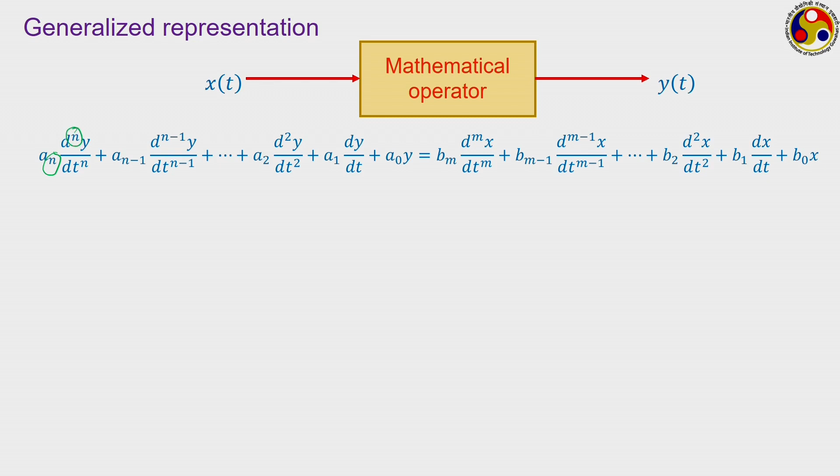Here a naught, a1, a2, all these are the coefficients, and this n is generally referred as the order of the system. On the right hand side we have the input part in terms of x, with several coefficients b naught, b1, b2, etc. up to m. N and m may be same or different, but both are integer numbers.

Order of the system is given by n, not by m. When n equals 0 we call that a zeroth order system, when n equals 1 we call it a first order system, and it goes on that way.

Now, quite commonly in mathematics or system analysis, instead of using the differential notation d/dt, we like to represent this in terms of an operator capital D. If you introduce that capital D operator, it looks quite similar to an algebraic equation, but be careful, D is not any algebraic quantity, rather it is just an operator, the differential operator. So this is the equation relating y and x in terms of this operator D.

Drawing analogy to algebra, we can represent them in a form where the numerator contains the coefficients associated with the input and denominator contains the coefficients associated with the output. Here we are getting a ratio of the output to the input. Both may be time varying or time invariant, but our focus is more on this right hand side, which gives the ratio of output to input.

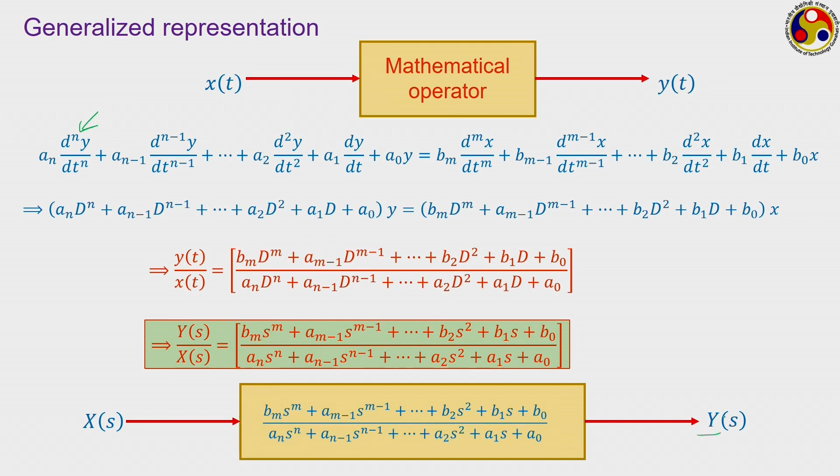The advantage of this Laplace transform is that the ordinary differential equation with time as the independent variable gets converted to an algebraic equation with S as the primary variable. Here input capital X is the Laplace transform version of the small input x, and capital Y is the output represented in the frequency domain, with the mathematical operator performed on x to get y.

This mathematical operator we often refer to as the transfer function. G is one common way of representing this, but there are several other ways too. This concept of transfer function is a very important one in this topic of measurement systems.

Some of you may have already gone through a course on control systems and found similar treatment there. If you have already done control systems, the entire content of this week may be very familiar to you. But the idea of transfer function is to represent the entire mathematical operation performed by this measurement system in terms of a single operator, which is this transfer function.

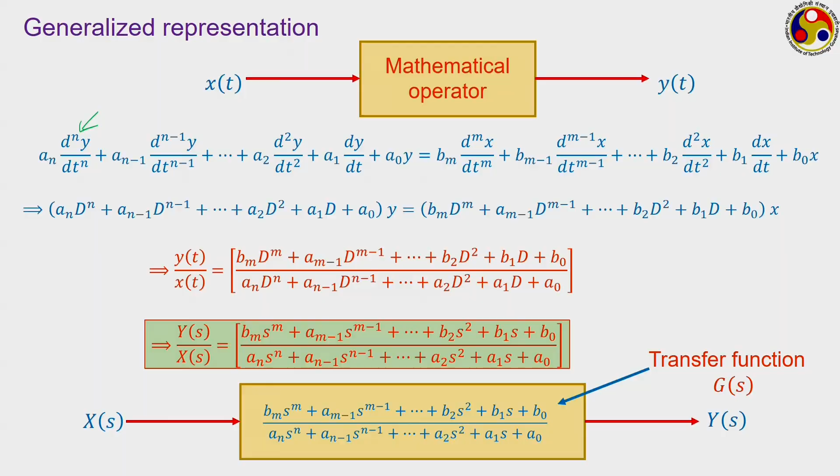Once we know the transfer function of one instrument, we can very easily relate the input and output by performing corresponding mathematical manipulations. An even bigger advantage is that when we have multiple instruments or components in a measurement, using these operators we can easily connect different components to get an equivalent transfer function.

Let us see an example here. This is an example of a quite complicated measurement system, where we are using a series of operations. Here R refers to the input and Y refers to the output.

Let us just instead of using R, stick to our original notation X. So X is the input, Y is the output, and here there are several operations being performed, like several instruments having their transfer functions as G1, G2, G4, etc. There are different components, and also 3 components, H1, H2 and H3, which refer to feedback.

I am sure you have some idea about feedback, which is primarily used for control operations. Whatever variable value you have here is passed to the component having transfer function G5, but that same signal is also routed through this feedback component back to the original input position. This gives, instead of supplying the original signal X, if there was no feedback the original signal would have been X, but here as we are supplying something, the original signal will be X plus H2 times whatever we have here.

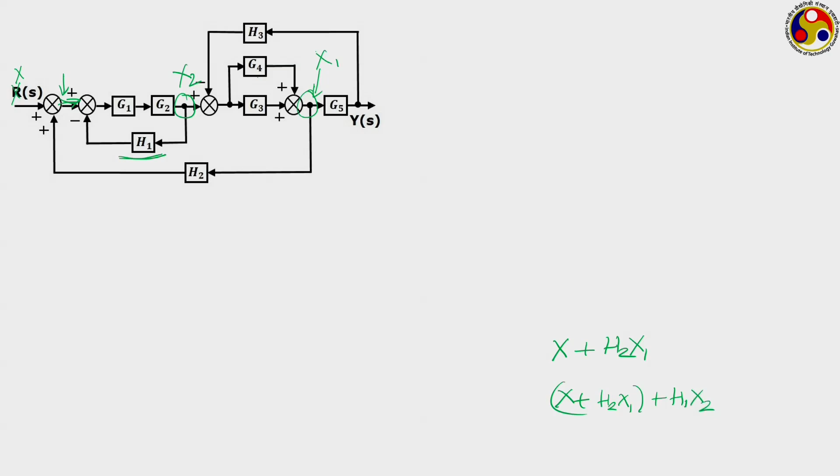Suppose at this particular point our variable value is X1, then it will be H2 times X1. This is the signal coming to this portion through this line. Then we have another feedback here. If the value of the signal at this point is X2, whatever is being transferred here is X plus H2X1, which was already coming, plus H1X2. This is the signal reaching this particular component. This is the idea of feedback, and using these components we can easily calculate the corresponding transformations.

Now there are several components. If we count properly, we can see there are 5 plus 3, total 8 components involved, each having its own transfer function, so somehow we have to combine them. That combination process can be very easy. There are generally 3 kinds of possibilities we get. First possibility, let me erase it to make it a bit cleaner.

First possibility is where we have 2 components connected in series. Connected in series means the output from the first component is directly fed to the second component. If the first one has transfer function G1, the second has transfer function G2, and X1 is the signal fed to G1, its output is X2. Then this output is directly fed as an input to the component having transfer function G2, giving a final output X3.

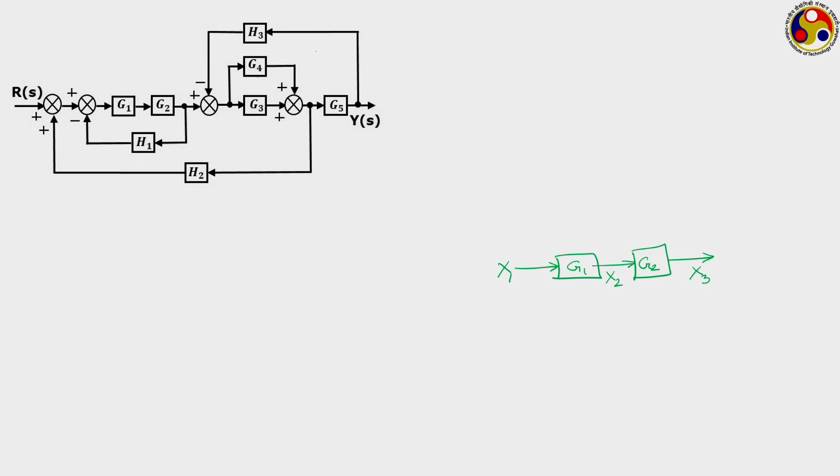Then how can we calculate this? Using the notation for the first component, we know output upon input, X2 upon X1, will be equal to G1, giving X2 equal to G1X1. Now look at the second component. Output from the second component is X3. What is the input we are giving? That is G1 into X1, and that leads to our output as X3.

Output from the second instrument is X3 and its input is G1X1. That equals the corresponding transfer function G2, giving X3 equal to G1G2X1. Hence X3 upon X1 equals G1G2, which is the combined transfer function of these 2 components. This means when 2 or more components are connected in series, their equivalent transfer function is the product of their individual transfer functions. We can see one such arrangement here. So this is possibility number 1.

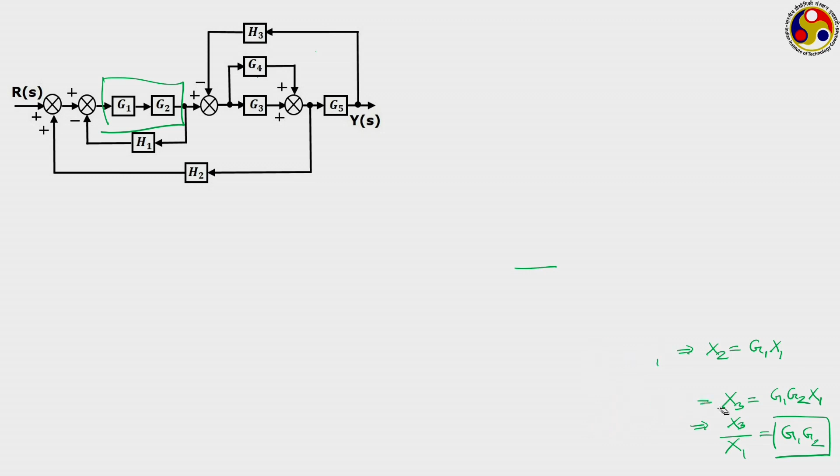Let us move to the second possibility: when components are connected in parallel. Parallel means they are subjected to the same inputs; rather, both ends are connected to the same point. If X is the net input supplied, a component of X which is X1 goes to the first component having transfer function G1, and the remaining portion X2 goes to the component having transfer function G2.

From the first component we get an output Y1, from the second we get an output Y2, giving us the net output Y. We can easily see that X equals X1 equals X2. Now what is the relation between X1 and Y1? Using the definition of transfer function, we know Y1 upon X1 equals G1, and Y2 upon X2 equals G2.

Hence y, which is y1 plus y2, will be equal to g1 x1 plus g2 x2. This is the net output we get. If our interest is to get the net transfer function of this full assembly, we need a relationship between net output y and net input x, which will be g1 x1 upon x plus g2 x2 upon x.

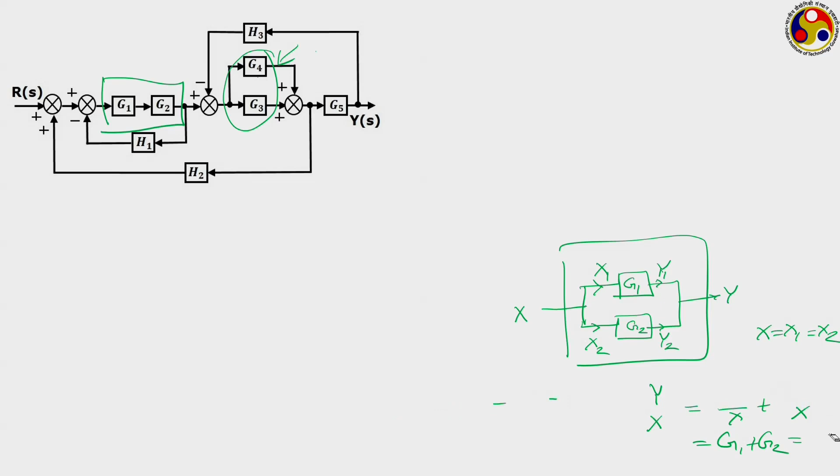Using this knowledge, we can say that for this assembly our equivalent transfer function will be g1 into g2, whereas for this assembly it will be g3 plus g4. That is what we have here: g1 into g2 replacing the individual components, and g3 plus g4 replacing the individual components.

Now we have another situation involving a feedback loop. The idea of feedback is: let you have an input x transferred to a component with transfer function g to get a net output y, but you want to control the value of y itself.

This output y is routed back to a feedback controller, generally denoted as h with its corresponding transfer function, and supplied here, where they may be connected by a summation component. So x is supplied here, and also a modified portion of y is supplied here, giving us this net.

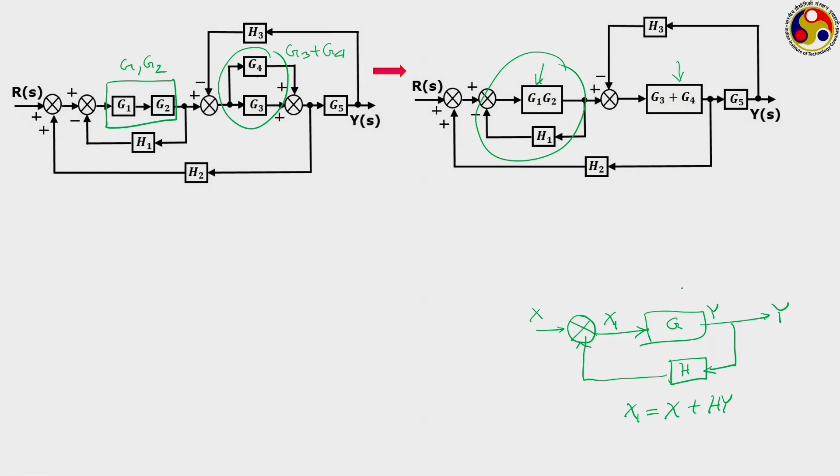So this may now become x1, and we get y as the output. What will x1 be? x1 equals x, the original input, plus h times y. Then going back to the original component, its output is y, and the input it senses is x1, which is x plus h into y, giving us g.

So we have y equal to gx plus ghy. If we rearrange, then 1 minus gh, times y, is equal to g into x, which leads us to a net transfer function, represented as g bar, equal to y upon x, as g upon 1 minus gh.

Here we assumed in this summation component that both signals are being added to each other, but that may not be the case. In this one both are added, but in this case they are subtracted. If subtraction is there, instead of 1 minus gh, it becomes 1 plus gh. So this way we can connect a feedback loop as well.

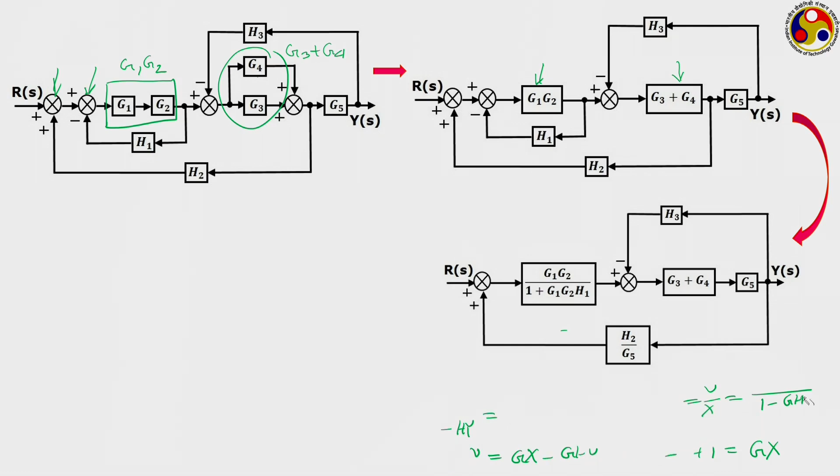Let us see what we have here. Let me clear this clutter. In this third step of modification, we have added the feedback components. Look at what we have: this G1 G2 combination has been combined with H1 to get G1 G2 by 1 plus G1 G2 H1. Look at where the minus sign is here, which led to this plus sign here.

We have also made another transformation: this particular component has been shifted to this part to make it easier. I leave it to you to calculate this H2 upon G5, using the same algebraic modification. The rest is quite easy.

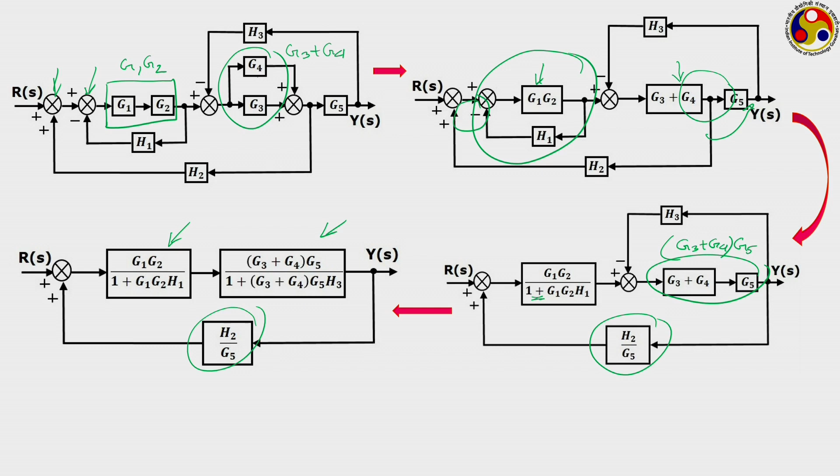This whole thing here, we have G3 plus G4 and G5, so the equivalence of this becomes G3 plus G4 into G5, with H3 as a feedback component leading to this. We already have this remaining part, and this is the feedback which leads to this final transfer function, so your input gets modified to give this output in terms of the transfer function.

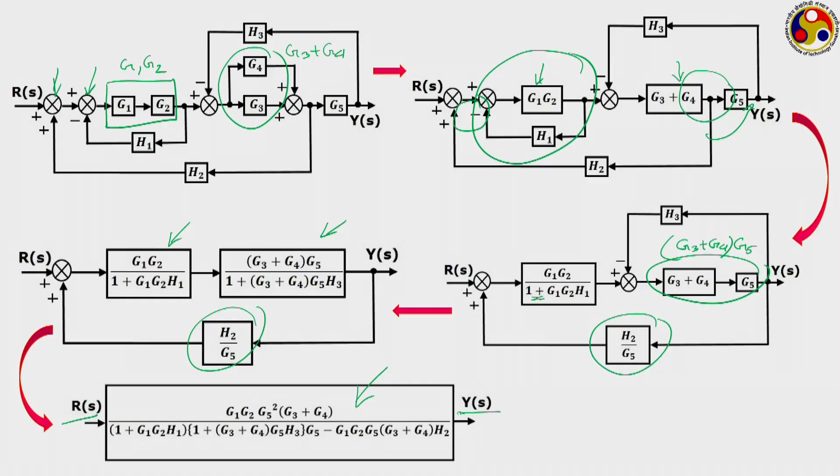Now, if we know the expressions for each of these individual 8 components, we have the final transfer function. So the concept of transfer function makes it very easy to combine different components of a measurement system into a single transfer function, which we can then deal with using several standard mathematical procedures. So today, in the remaining part of this lecture, we shall discuss how to derive these transfer functions.

Before that, we have to talk a bit about standard inputs also. Once we know the standard transfer function of a particular component, theoretically it is possible to subject that instrument to infinite types of inputs, but it is not possible to standardize the response for each of such possible inputs. So what is commonly done is we test the response of a measurement system with known transfer function against some standard inputs, and whenever we are dealing with an unknown or different kind of input, we try to represent it as a combination of the standard inputs.

As we have seen in the previous lecture, whenever we have a periodic function to deal with, we can separate it into several harmonic components, and then the net response of the system should be the summation of the individual responses to each of the harmonics. Similarly, there are a few other types of standard inputs possible.

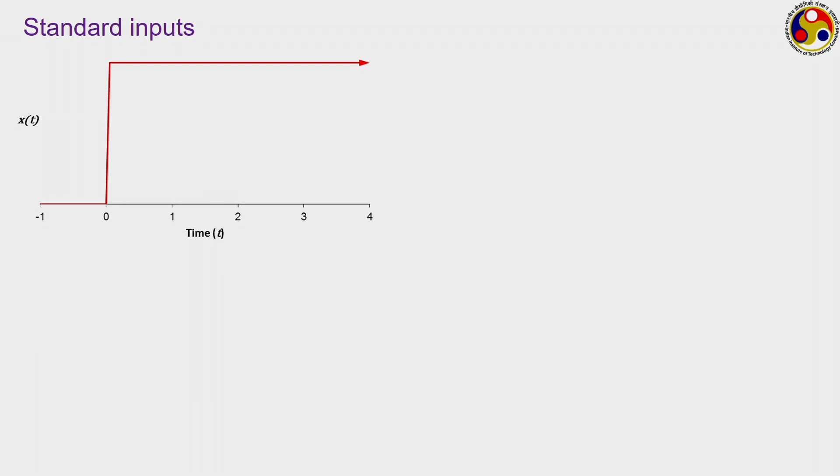Like this first one, something we have already seen in the previous lecture. Here the input is 0 or constant till a particular instant of time, and then there is a sudden jump in the input to reach another constant value and remain there for the rest of the time. This is referred to as a step input. So x equals 0 as per the diagram here till t less than 0, and for t greater equal to 0 it becomes a constant.

This constant can be positive or negative, and the initial value may have some other value also. Like the example discussed in the last lecture, a thermometer was initially at a temperature of say 30 degrees Celsius, and suddenly we take it to an environment having a temperature of 90 degrees Celsius. Then this is being subjected to a step input.

Instead of an increase in value, suppose we take it in contact with a block of ice, then it has again been subjected to a step input, but instead of an increase in value, it is suffering a decrease in value. Such inputs are called step inputs.

Along with the thermometer, there can be several other examples. Let's say a very arbitrary example: you want to measure the mass of a pack of sand. Initially your measuring platform is empty, no load, and now you suddenly drop this entire bag on top of it. So its load was initially 0, and now suddenly it is being subjected to a constant mass. If the mass of the bag is 50 kg, the load suddenly increases from 0 to 50 kg, and that 50 kg is retained. So that is what we refer to as a step input.

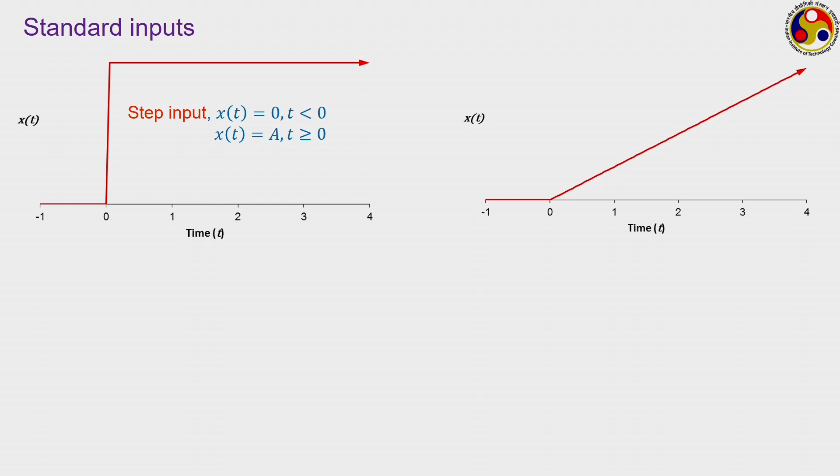Next is the ramp input. Here the input signal is 0 till a certain time, and then it changes, but there is no drastic change, rather it changes continuously with time following a linear path. This kind of input is referred to as the ramp input. So the input equals 0 initially, and from t greater equal to 0 onwards, it is a linear function of time where a gives you the slope of this particular line.

The ramp version can be thought of using the thermometer example. Initially you have a pool of water and your thermometer bulb is dipped into this pool, both at the same temperature. Now suddenly you take this assembly into a heater and start heating the water at a constant rate. We can expect the temperature of water to increase following a constant rate, and hence the thermometer will be sensing a continuous change in its input temperature value, resembling the ramp input.

If we talk about the pack of sand, instead of suddenly dropping the entire bag, we kept on adding sand on the measuring platform at a constant rate. We just cut open the bag, and at a constant rate we keep dropping the sand on it. So that is like a ramp input. Both step and ramp are quite common kinds of inputs in practical applications, and hence it is very important to test the response of any measurement system against these two inputs.

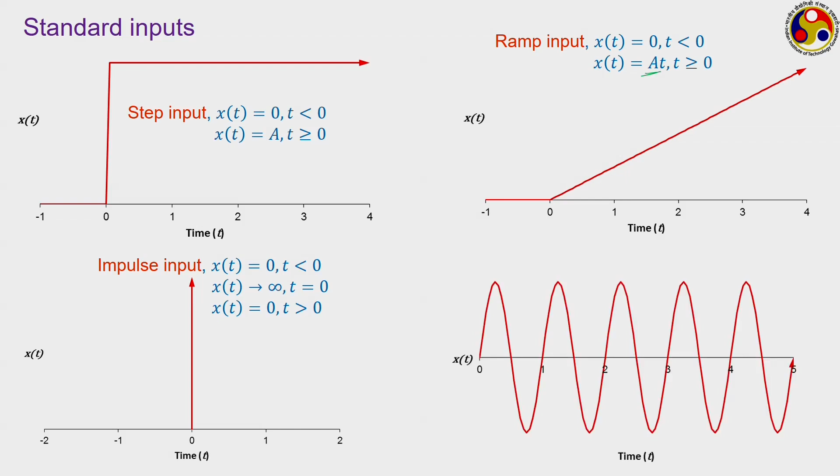More about impulse input we shall discuss in the next lecture, when we subject systems to impulse input. The other one is the standard periodic input. As we can represent any periodic function as a combination of several sine waves, we generally test any measurement system against a standard sine wave and test its response corresponding to the change in amplitude and change in frequency omega. So both A and omega are generally varied to test the response of the system, and accordingly we can extrapolate it for any periodic function.

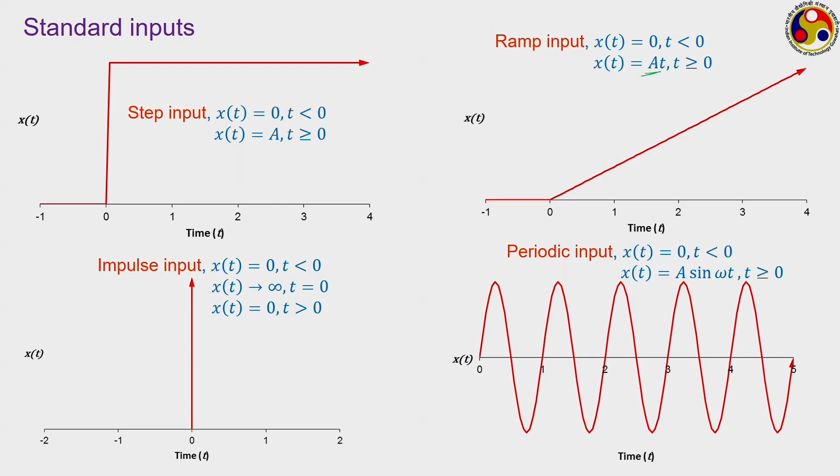The response of a system against any standard input is generally referred to with the corresponding name. When we excite a measurement system using a step input, we call it a step response. When we use a ramp input, we call it a ramp response. Similarly, we call it impulse response, and when we subject it to a periodic function, we generally call it a frequency response, a term already introduced in the last lecture.

So the first one in line is a zero order system. A zero order system is when the order of the system, that n we referred to, is equal to 0. So what will be the form for this? It will be a naught y equals b naught x. Here we are talking about n equal to 0, we are not putting any restriction on m.

So instead of having just b naught x, we can have several other terms also, that is b1 dx/dt plus b2 d2x/dt2 and so on. But from our practical experience, we have seen that we never need to consider these higher order terms for the input. Just this b naught x itself is sufficient regardless of what type or order of system we are dealing with. So we shall restrict our input side only to this b naught x component.

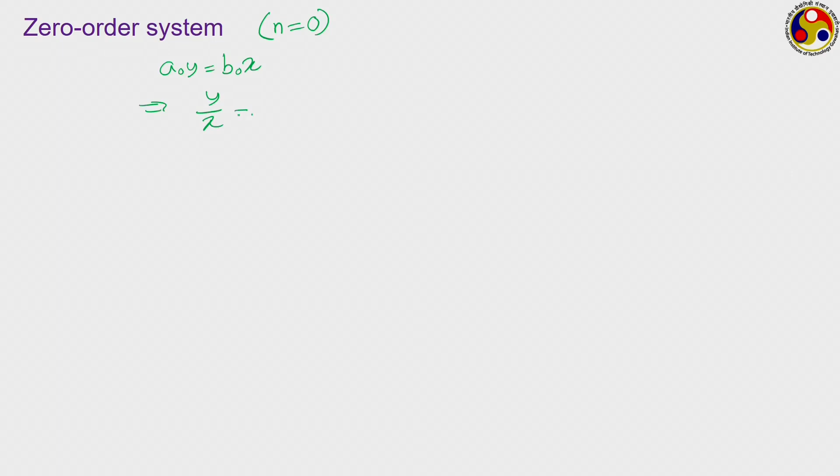But on the output side we are taking a zero order system, that is we are putting n equal to 0, and once we put n equal to 0, then your transfer function, that is y upon x, will be equal to b naught upon a naught. This particular component b naught upon a naught is referred to as the static sensitivity or steady state gain of an instrument.

What does it suggest or what does it look like? The static sensitivity is just a ratio of output to input, something very similar to the amplification or gain we talked about earlier. That is, the static sensitivity is nothing but an amplification in the output. It is giving a ratio of output to input, and if both x and y are time invariant, then the static sensitivity reduces to the sensitivity we defined in the previous week.

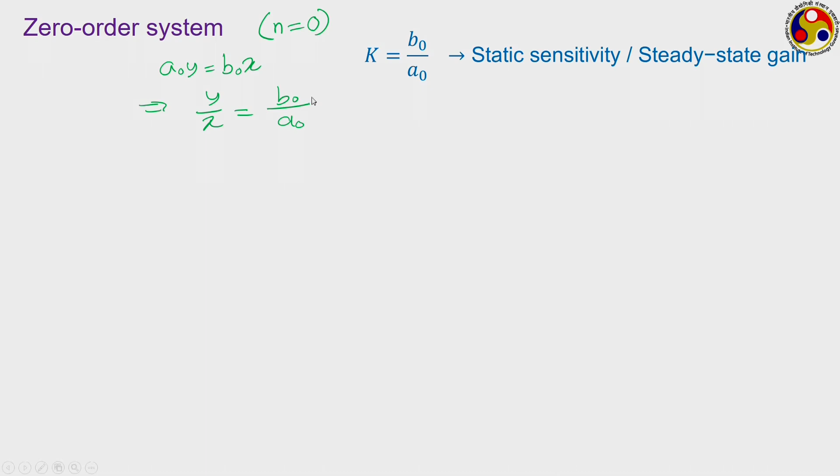That is why this name is actually drawn from there. It represents the slope of a static calibration curve, and if the instrument is subjected to a steady state input, it will also give you the amplification. This zero order system is therefore characterized by the static sensitivity, which is a measure of amplification. It is the most ideal system we can have, because our transfer function is just a single k, a one parameter k, with none of the differential operators appearing. So once we know the value of this k, the static sensitivity, we can easily correlate the output and input. It is the simplest possible measurement system we can have.

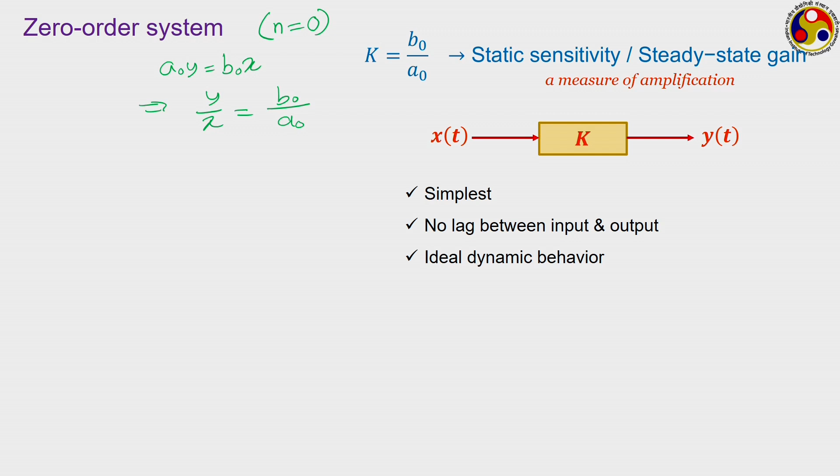There is no lag between the input and output, meaning whatever input you provide, you will instantly get the output, and the value of input and output will differ by this static sensitivity k. It is the ideal dynamic behavior that we expect from any measurement system.

Suppose we subject the instrument to a step input, this blue line represents the input. Depending on the value of k, it instantaneously gives the output, shown by this red line. Depending on the value of k, the output magnitude can be higher or lower than the input, or if k equals 1, both lines superimpose, but there is no time lag.

As soon as you provide the input, the system responds. It immediately gives the output value, which is what we want, meaning we do not have to wait to get any measurement. By varying the value of k, we can also amplify the signal, increasing or reducing its magnitude to whatever range we want.

Even when subjected to a periodic signal, look at this. Here the red one shows the output. We again get another sine wave having the same frequency, but maybe a different amplitude depending upon the static sensitivity of your instrument. So a zero order system is the most ideal system we want, able to provide instantaneous response.

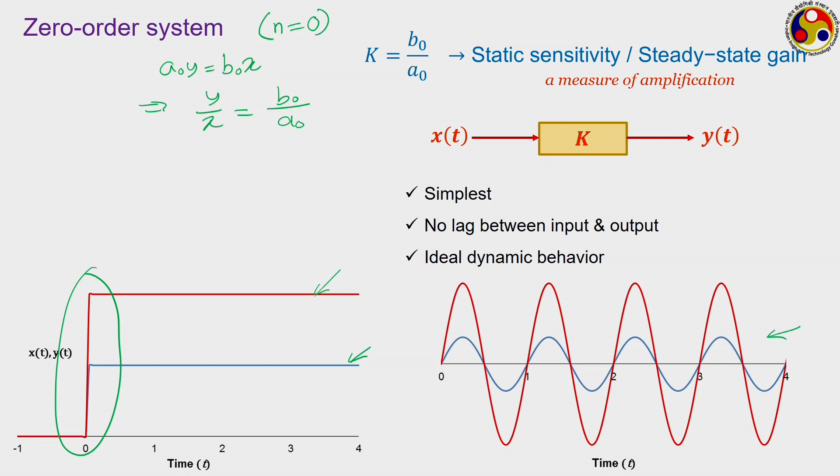Here there is no phase lag. If we are dealing with a zero order system and there are suppose three harmonics present in the input signal, it will not impose any artificial phase lag on the harmonics at the output. That is the most ideal behavior we can expect.

Something that very closely resembles the input is the resistance based displacement sensor called the potentiometer. In the concerned module, we shall discuss potentiometer more, but the principle is that you have a resistance like this, excited by a constant voltage source. Let x1 be the original height of the resistance, and the displacement that you want to measure is connected with this particular needle.

As the system moves, this needle keeps moving up and down along this resistor. So as the system moves, the voltage available at this side also keeps varying. Suppose the total resistance is proportional to the length of the resistor, then x1 is the original length.

At a particular instant, your indicator is connecting this x2. If E is the voltage being imposed and small e naught refers to the voltage your indicator is showing, the ratio of output E naught to input E will be a straightforward relation between x2 and x1, a straight line relation, that is a perfect zero order instrument. Instead of a linear scale, sometimes we can also use an angular scale to measure angular displacement, but regarding the potentiometer we shall talk more later.

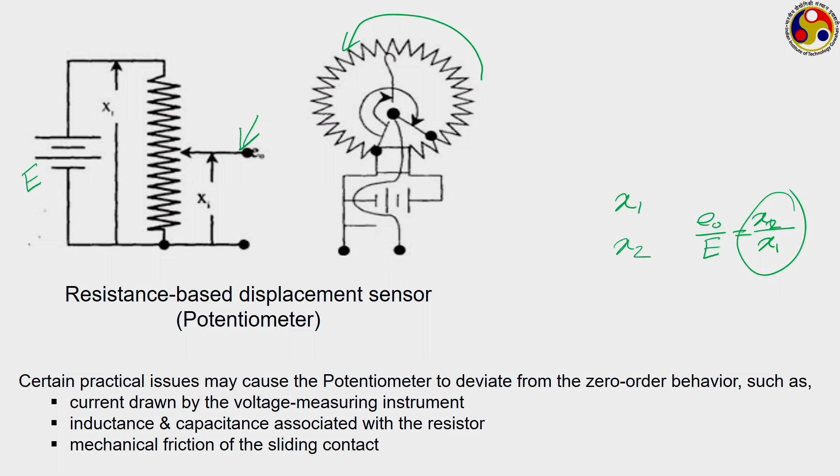For a first order instrument, we have n equal to 1. Going back to our original equation, we have a1 dy/dt plus a naught y is equal to b naught x. Remember, we are not taking any term after the first one on the right hand side. Going back to our differential representation, we can write it as (a1 D plus a naught) y is equal to b naught x.

So we have three coefficients to deal with: a1, a naught, and b naught. All other coefficients are 0 for a first order system. Truly speaking, we do not need three coefficients. We can always divide the other two by any one of the coefficients, thereby reducing the required number of parameters to just 2. We can either divide everything by a1 or a naught.

Just to be consistent with what we have done for the zero order system, let us divide everything by a naught. So if we divide everything by a naught, we have (a1/a naught D plus 1) y is equal to (b naught/a naught) x.

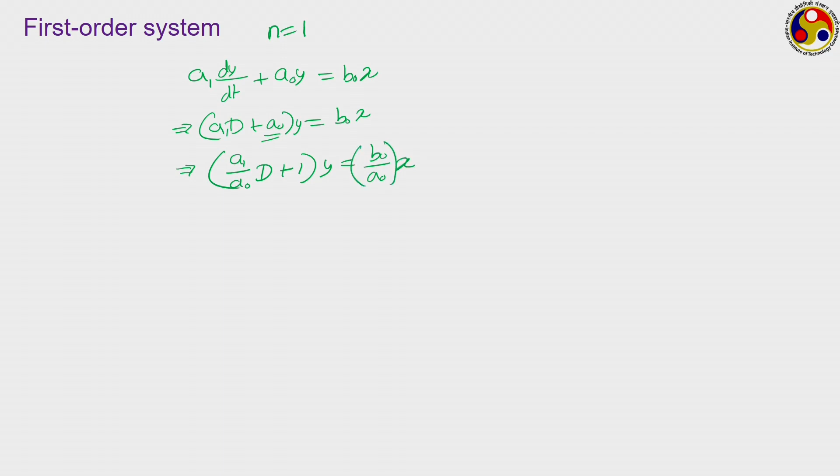What is b naught upon a naught? We have already seen for the zeroth order system that this is the static sensitivity or steady state gain. But we are having a new term here, this a1 upon a naught. What do you feel will be the dimension for this quantity? Before that, what is the dimension of your static sensitivity, K?

Thinking about the zero order instrument, K, which is b naught upon a naught, is directly your Yt upon Xt. So the unit of K will be the unit of output by unit of input. If you think about a liquid in glass thermometer, the output is the displacement of mercury inside the column, so Y will have a unit of meter or some corresponding length scale, and X is the input, the temperature or change in temperature, so it will be degree Celsius or degree Kelvin. So output to input, whatever is the unit, the same will be the unit for this K.

But what about this quantity a1 upon a naught? Look at this equation carefully: a1 upon a naught, whatever may be the nature of your X and Y, you will always find this. Here you have one involved, which is a dimensionless quantity, and you have a differential operator involved. So if you look carefully, this a1 upon a naught will always have a dimension of time. We shall be seeing one example maybe in the next slide.

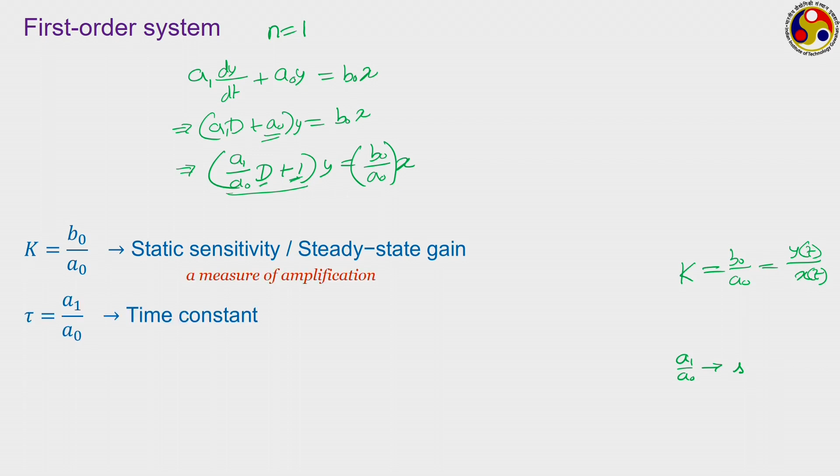This is why it is often referred to as a time constant tau, which gives a measure of the speed of the system response. Accordingly, we can represent this first order system as (tau D plus 1) y is equal to k into x, or this is the corresponding form in transfer function.

K upon tau D plus 1 is the transfer function for a first order system. It is different from the zeroth order, because here we have a denominator involved and we can't have just a straight one to one correspondence between output and input. Rather, we have one differential operator involved in this D, and also unlike in zeroth order system there is only one characterizing parameter in form of static sensitivity.

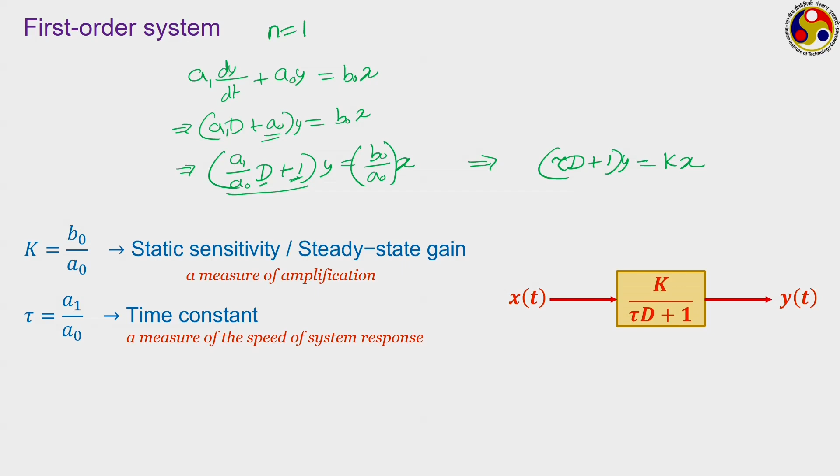Here we have another one to deal with, which is this time constant. So, time constant gives a measure of the speed of system response, and it is always desirable to wait and see whether we want a larger value of tau or a smaller value of tau. We shall be seeing through some examples.

Now, example for first order system, there are several. Most common one is a liquid in glass thermometer. There can be other examples like one capacitor discharging current through a resistor, or one tank of water leaking through a valve. These are all very common examples of first order system. We shall be seeing a few more examples later on. Let us just concentrate on this one.

We have a common thermometer which is being dipped into a pool of water. Let us perform an energy balance over the bulb of the thermometer. If we think about the thermometer bulb, this is the bulb, the hashed portion. This bulb may be having a volume VB and a surface area of AS.

Then, whatever may be the initial temperature, if that is different from the temperature of the surrounding water, then it will experience some heat exchange. Let us assume that the surrounding fluid is at a higher temperature, then heat will be flowing into this. What is the mode of heat transfer here? Correct, it is convective heat transfer, and the result of this heat transfer will be a change in the total energy content of the thermometric fluid.

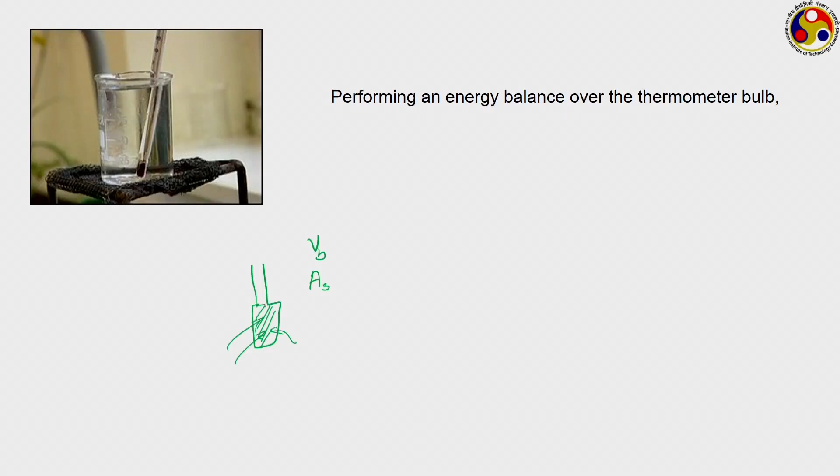So, using this, let us write an energy balance for this thermometer bulb. How much energy is being supplied in the form of convection, that will be U, the overall heat transfer coefficient, into the surface area AS, into the T of the surrounding fluid - let us say T infinity refers to the surrounding fluid, minus Tf refers to the thermometric fluid. Both can be a function of time. Of course T infinity itself can be a function of time, and the fluid temperature Tf definitely is a function of time. Let us neglect any heat loss from this.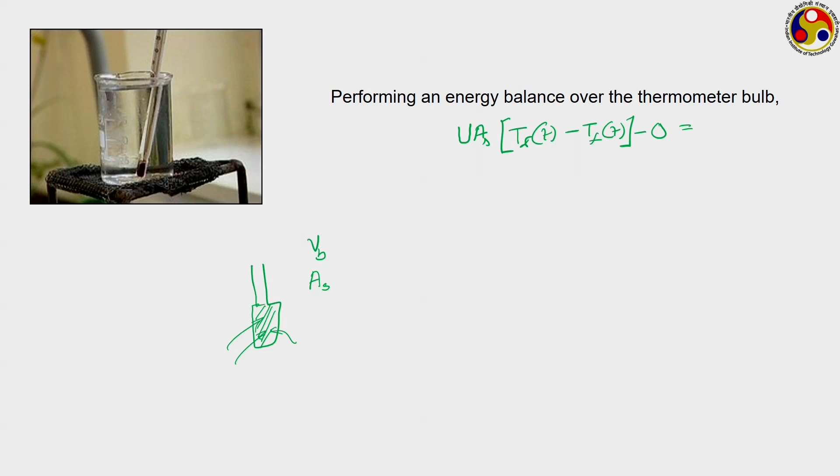So, this is the amount of heat addition, there is no loss. This entire quantity will lead to a change in the energy content of the system. Now, how can we calculate the energy content, or how much is the energy change in this energy content? Let us perform this energy balance over a small interval dt. This is the total amount of energy that has been received by the thermometer bulb, minus there is no loss. And if over this small period of time dt, there is dTf amount of change in the temperature of the thermometric fluid, maybe mercury, then how much will be the change in total energy content?

That will be the mass of the thermometric fluid, which is rho into Vb, into its specific heat, into the change in its temperature. Here C is the specific heat, rho is the density, both correspond to the thermometric fluid, Vb as we have mentioned. And so, we simplify this.

So, we have UAS T infinity minus UAS Tf is equal to rho Vb C dTf dt, or written in a more formal way: rho Vb C dTf dt plus UAS Tf is equal to UAS T infinity. Remember, T infinity itself can be a function of time. So how does this equation look? Very similar to a first order equation: this one is your A1, this one is your A naught, and this one is your B naught. T infinity represents the x, Tf represents the y, and time is the variable for this.

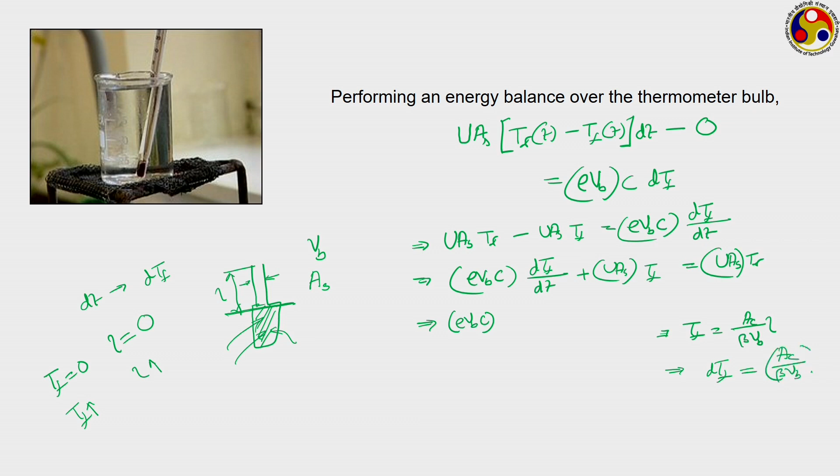So let us replace this in the earlier equation. Going back to the earlier equation, we have rho Vbc, and from here we can also write that dTf will equal AC upon beta Vb into dL. Putting this in, we have AC upon beta Vb into dL dt, plus the original equation at UAS into AC upon beta Vb into L, is equal to UAS T infinity.

So the original equation, which was in terms of Tf, we have now converted in terms of L, where L is the output and T infinity is the input. Now if you divide everything by A naught, we get rho VBC divided by UAS into dL dt, plus L equal to beta VB upon AC times T infinity.

So this is the final equation, written in a much clearer fashion. What is this term? Beta VB by AC is the static sensitivity or steady state gain, and rho C VB upon UAS is the time constant for the system.

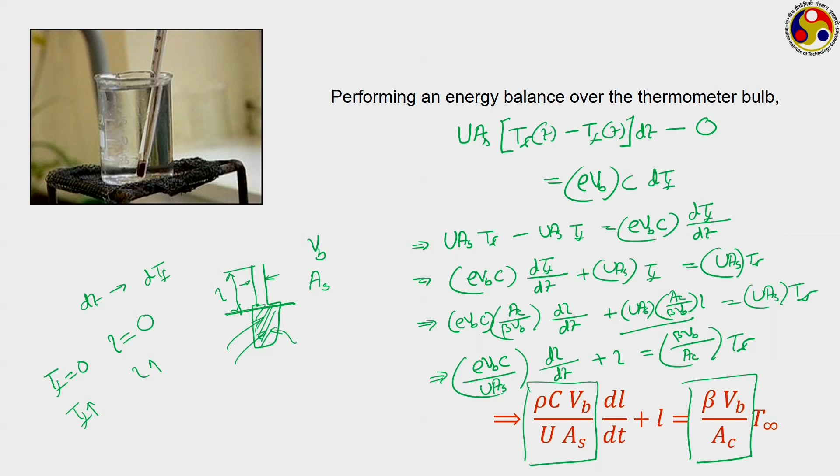But like in the case of the zeroth order system, there are several factors which may cause the first order system to deviate from its first order behavior. We have already made several assumptions in this derivation. First, we have neglected any heat storage capacity of the wall material, like the glass. We have assumed that is not storing any heat, and also there may be a small film of liquid on the outer side and a small film of thermometric liquid on the inner side of the bulb, whose heat storage capacity we are neglecting.

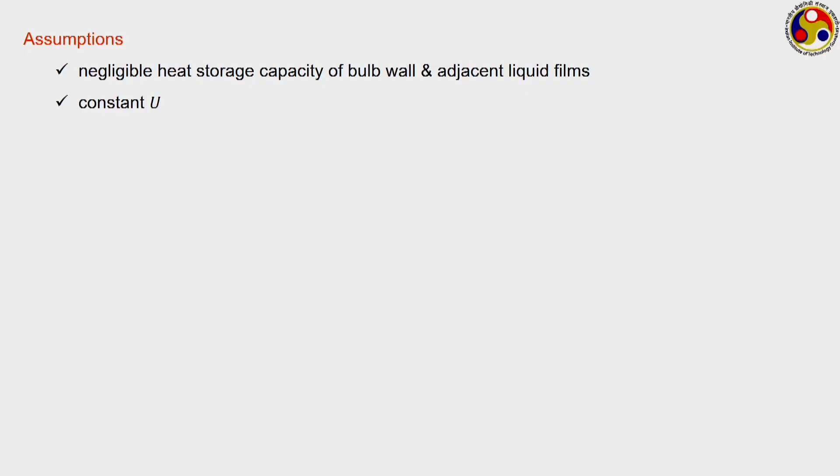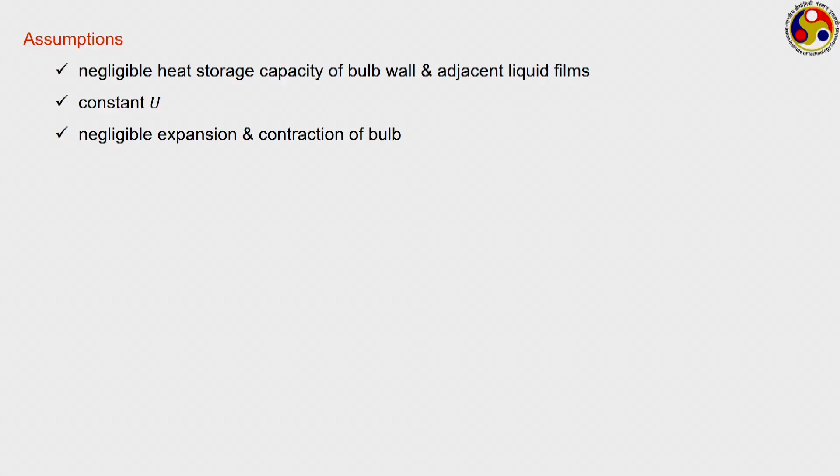We have assumed U to be constant, but truly U itself may be a function of temperature, because properties of the fluid, both the thermometric fluid and the exterior fluid, can vary with temperature. We have also neglected the expansion and contraction of the bulb. That is not a bad assumption, since glass kind of material has a very small expansion coefficient, and this is generally negligible as long as the temperature change is limited.

We have neglected any heat conduction along the stem to the upper side of the capillary tube. Again, if we choose a material with very low thermal conductivity, this is not a bad assumption. We have also assumed constant mass of fluid inside the bulb.

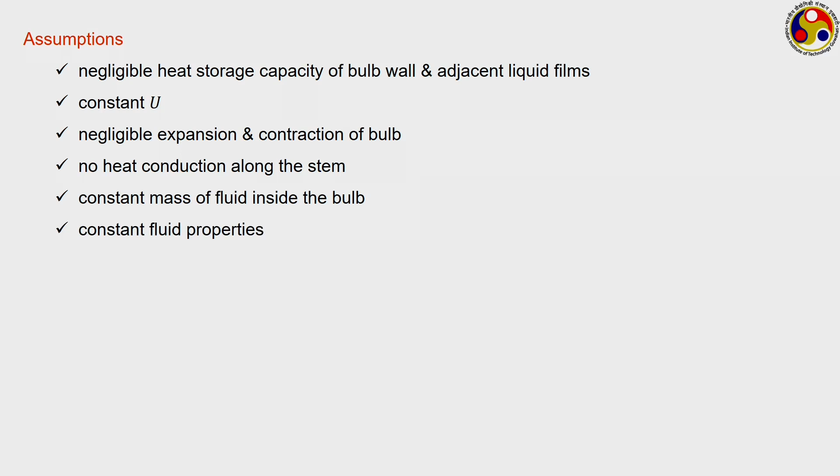Whenever expansion takes place, some fluid moves out of the bulb. During contraction, some fluid moves back into the bulb, but if the diameter of the capillary is very small, then the amount of mass that goes out of the bulb can be very small, almost negligible.

And finally, we have assumed the fluid properties to be constant. So with this we have got these two expressions for K and tau. Let's look at what will be the unit for this K and tau. We will do this unit calculation from the right hand side.

Beta is the volumetric expansion coefficient. What is its unit, do you remember? It is rate of change of volume per unit temperature, so its unit is 1 upon degree Celsius, where we are sticking to Celsius as the unit for temperature. VB is volume, so it is meter cube. AC is area, so meter square, giving the unit of this quantity to be meter per degree Celsius. Like we discussed earlier, meter is the unit for your actual output, which is length.

Degree Celsius is the unit for your actual input, which is the temperature of the exterior fluid. Now come to the time constant. Here you have rho, and rho's SI unit is kg upon meter cube. C is specific heat, so it can be taken as joule per kg degree Celsius. Then you have VB upon AS.

VB is meter cube upon meter square, and U, the overall heat transfer coefficient, is watt per meter square degree Celsius. As we already have a joule, instead of watt we write it as joule per unit time. Now look at this: the meter cube goes off, here we have a meter square which corresponds to AS, so the meter square goes off, degree Celsius, joule and also kg go off, leaving only seconds, which is the time constant for this.

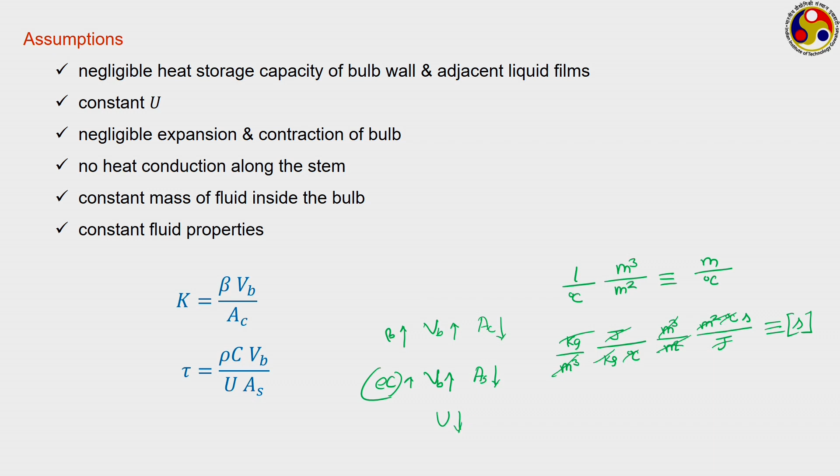Similarly, for time constant, if we want high time constant, rho c product should be high, Vb should be high and surface area should be low, whereas the heat transfer coefficient should be as low as possible. So a high value of Vb gives us a high value of K and also a high value of tau. High sensitivity is always desirable, but for time constant we do not know yet. Let us check it with respect to one standard input.

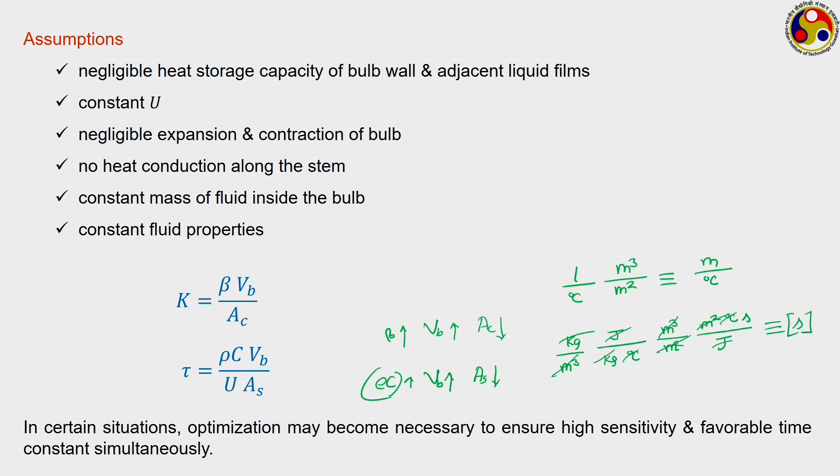In certain situations, however, the way the parameters affect K and tau may be contrary to each other. So we may have to go for some kind of optimization to identify both high sensitivity and favorable time constant. So first we check the step response.

We know this is the step response, so how do we do it? We know for a first order system this is the standard form, where K is the static sensitivity and A is the input, for any value of t or any value of time greater than 0. So we have to solve it.

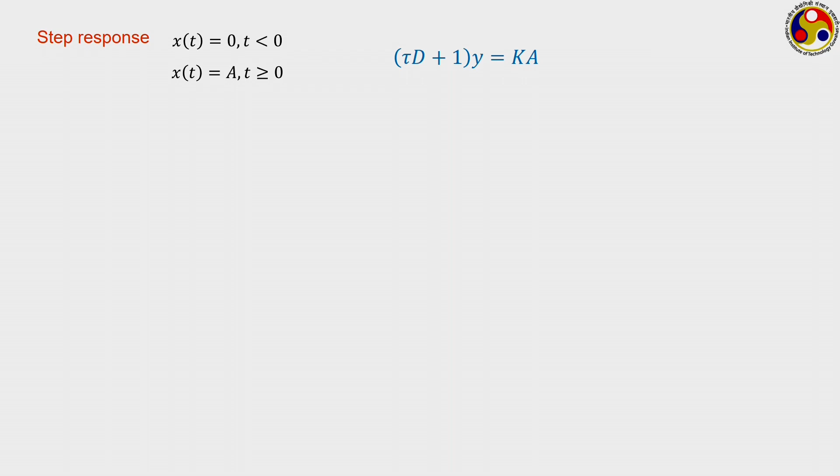Any ordinary differential equation of this kind can be solved in two parts: one is called the complementary function, the other is the particular integral. In this particular case, the complementary function for y will be some constant c into e to the power minus t upon tau, whereas the particular integral will be the right hand side itself, Ka. So the actual solution for y will be the summation of these two, that is c into e to the power minus t upon tau plus Ka, but c is an arbitrary constant.

So we have to get the value from our initial conditions. What condition do we know? We know that at t equal to 0, y is equal to 0. So if you put this value, 0 will give you c into e to the power 0 plus Ka, leaving us c equal to minus Ka.

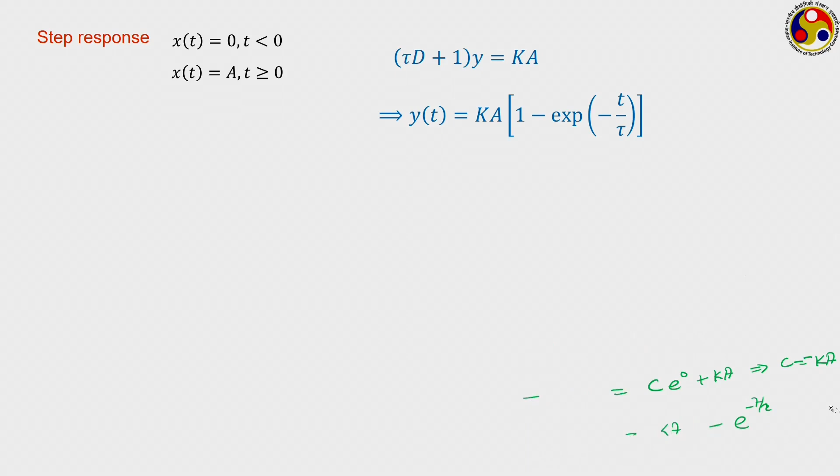So we put it together, the final expression for yt comes to be equal to Ka into 1 minus e to the power minus t upon tau, where K and tau are the properties of your measurement system, A is the amplitude of the step input provided, and t is the time variable which changes from 0 and can go to infinity.

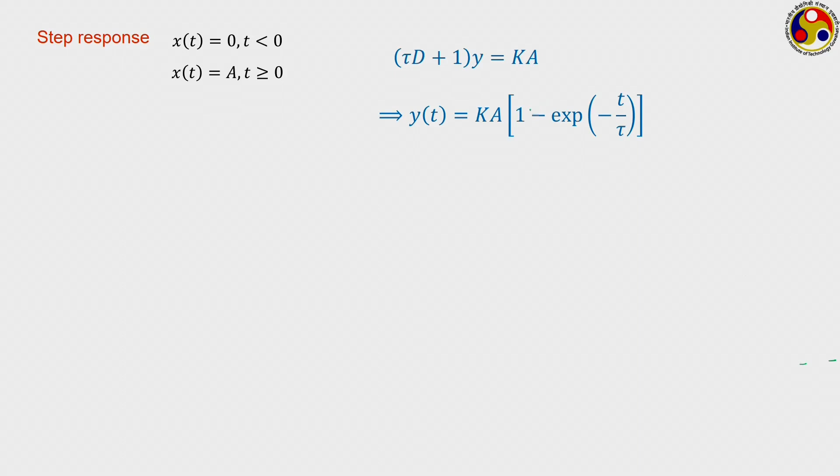You can clearly see there are two parts of this solution. One is this constant value, and the other is this particular quantity. We can explain it more if we represent the solution in this form, dividing the output by K into A, thereby making it non-dimensional. Here this term is 1, representing a constant, and this other term is a negative exponential term.

So when t equals 0, this exponential term goes to 1, giving the left hand side, that is y upon K into A, equal to 0. But when t tends to infinity, then this exponential term goes to 0, leaving this to be equal to 1.

That means this actually is a measure of the error that can be present in the system. As we move with time, this exponential term, this error, keeps on reducing, and for a very long duration of time this goes to 0, thereby giving ideal response from your measurement system.

This is one example where we have taken K to be equal to 1 and tau equal to 0.5 second. The blue line is the input, your step input, and the red one is the output we are getting. Unlike the zeroth order system, we are not getting an immediate response here. The system starts to respond from this point itself, but it will take some time to reach the actual signal.

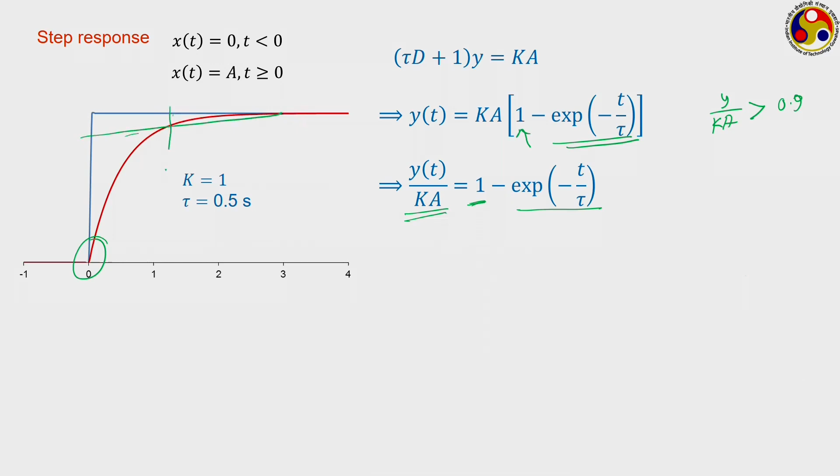Once this y upon K value becomes greater than 0.9, we can say that the output has reached within 10% of your desirable value. Let's say if this is the range, then we can say this is the point where your system enters that band. So this particular period can be referred to as your settling time.

But let us now check what can be the effect of your time constant. Here we have compared 3 different time constants. The continuous red line is the same, this line refers to tau equal to 0.25, and this line refers to tau equal to 1. What we can see is, as the time constant increases, the system requires more time to reach the actual output, or the settling time keeps on increasing.

That is why it is always better to have a system with a smaller time constant. That is logical also, because time constant gives you the speed of system response. Smaller the value of time constant, higher is the speed of system response. So we always prefer a system with a smaller time constant.

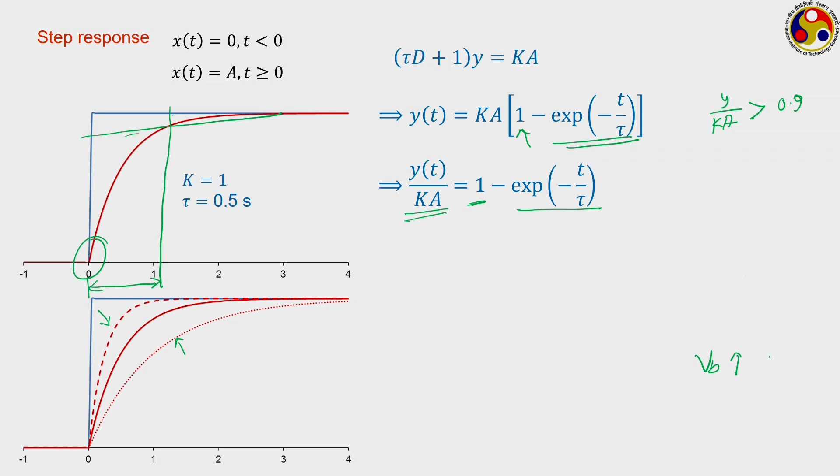Now if you just refer back to the example of the thermometer we used earlier, there we have seen that when the VB increases, sensitivity increases, but time constant also increases. Therefore we may have to go for some kind of trade-off, because a higher volume of this bulb will give you higher sensitivity, but at the expense of a larger time constant. And time constant is very precious, because we can't wait an infinite amount of time to get output from the system.

The measurement error is often referred to as the input minus this y upon K quantity. So in this case it will be A into e to the power minus t upon tau, and if we plot that with time, you can see that initially your measurement error is 1, referring to this particular point, and as time goes on the error keeps on reducing.

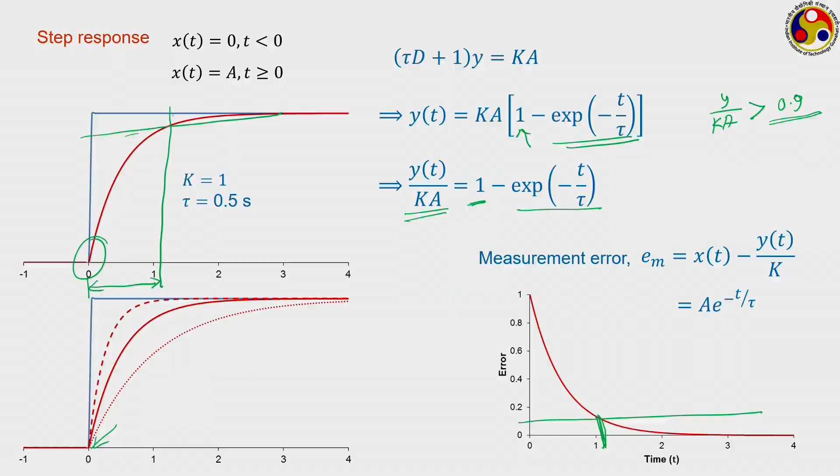If we are sticking to a 90% band, then we can allow a maximum of 10% error in measurement. So somewhere here, if 0.1 value is where the system enters that band, from this point onwards we can take the reading. Think about a clinical thermometer: we put it in contact with our body, but we do not take the reading immediately. We wait for some time, say 1.5 or 2 minutes, because it has a certain time constant, requiring certain time to enter the allowable error limit before we take the reading. A higher time constant is not desirable; we always prefer an instrument with a smaller time constant.

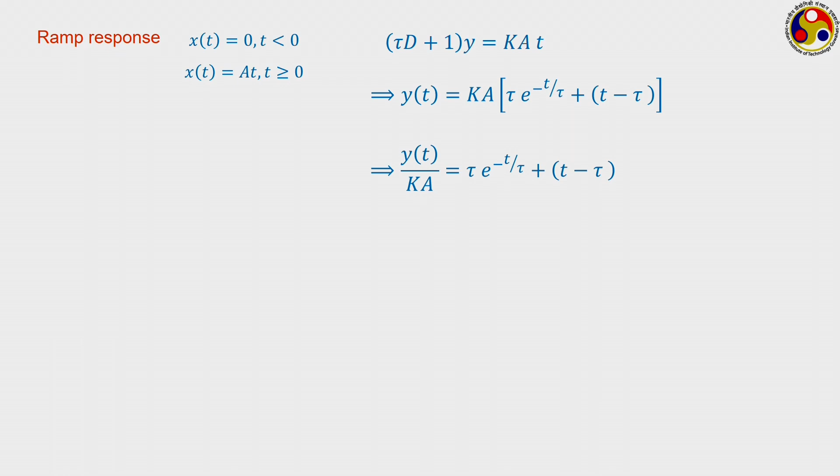We shall be checking another response today, the ramp response. We know this is the form of the ramp, so this is the corresponding functional form. If we solve this following the complementary function and particular integral, we get a solution of this form with two parts, both involving tau, and we check out the measurement error, giving a form like this.

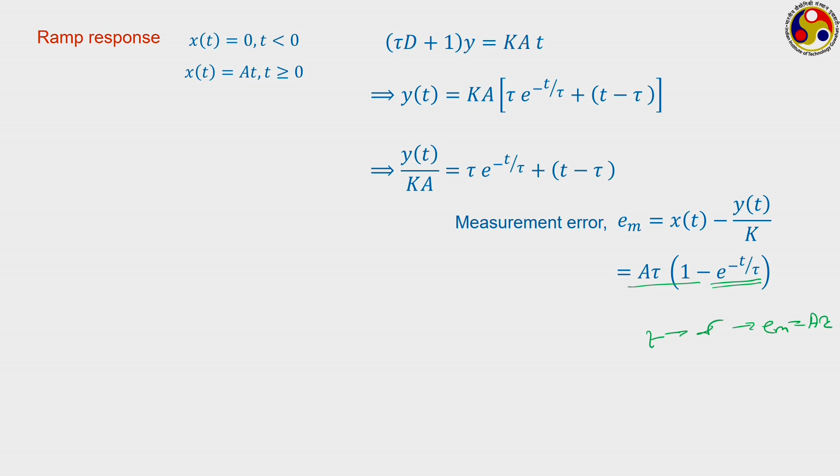Look carefully here: in the previous case the error had only one part, an exponential term, a times e to the power minus t upon tau, with step input. But here we have 1 minus that term. As time goes on, this term goes to zero, but what we are left with, as time t tends to infinity, is that the measurement error becomes a tau. That means it attains a constant value. In the case of ramp response, the system will always have some constant error, often referred to as steady state error, and it will never be able to reach the actual input value. As the input keeps increasing, the output will keep following it, but with a constant gap.

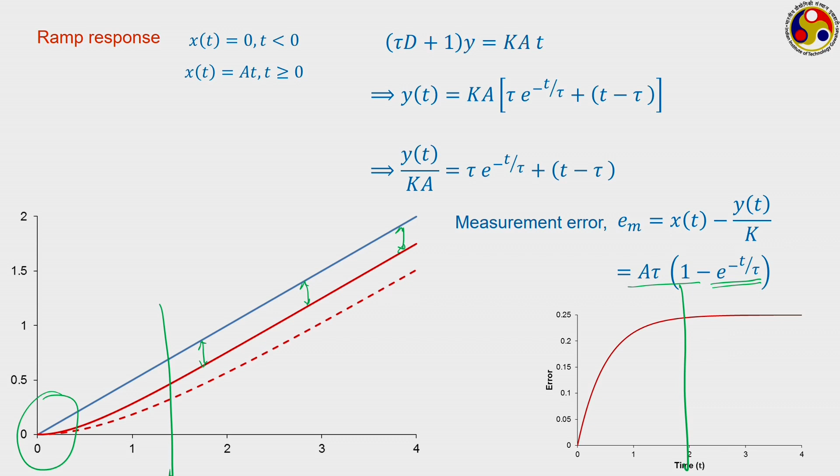So these are the step and ramp responses. We shall talk a bit more on them in the next lecture, and we shall also check out the response of a first order system in terms of impulse and frequency response, and then move on to the second order system.

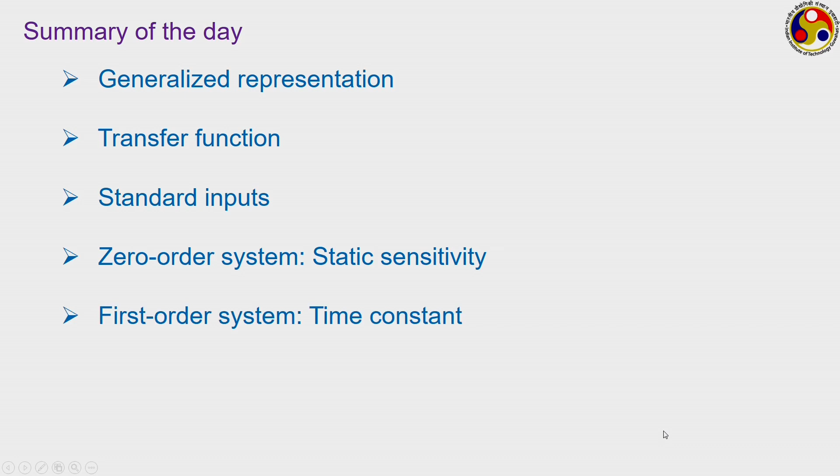To sum up what we have learned today: we talked about the generalized representation, developed the generalized mathematical model, then transfer functions were introduced, and we saw how to combine transfer functions. We talked about different standard inputs - step, ramp, impulse and frequency or periodic input. Then we discussed zeroth order system, which gave the concept of static sensitivity as the characterizing parameter for a zeroth order system. Then the first order system introduced the time constant, and we discussed the step and ramp response of the first order system. In the next lecture, which I expect to be the last this week, we shall discuss a few more examples of first order systems, their response to impulse and periodic inputs, maybe solving a few numericals, and then talk about second order systems. Generally we do not have to go beyond second order systems, because all common measurement systems can be classified as zeroth, first, or second order.